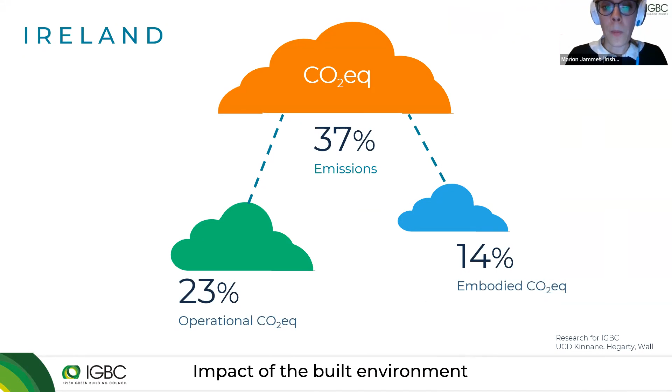And when that was done, we did ask them to do some projections to 2030 and to some degree to 2050. This is always difficult as soon as you start doing projections, but the data that you have on that slide are based on existing policies, for instance the Housing for All strategy, the Climate Action Plan, the National Development Plan, and so on. And the full carbon modeling report is available as well on our website.

But basically what that graph shows is that based on our existing policies, our operational emissions, in green on the graph, should decrease significantly to 2030. So that's really if we meet all our renovation targets in the Climate Action Plan, and we all know that's going to be challenging, but if we do retrofit the 500,000 homes by 2030, and if we build new buildings to the NZEB standard and so on, our operational emissions would decrease significantly to 2030.

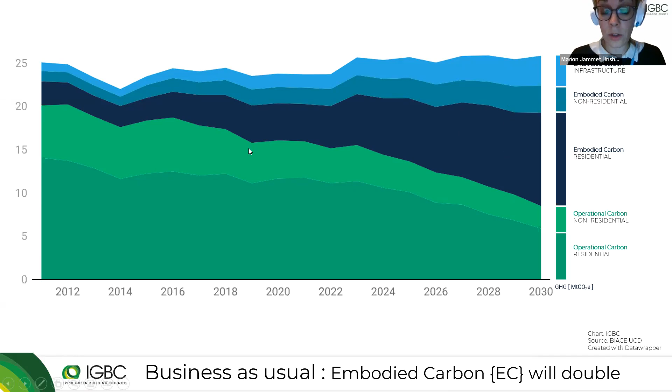The problem here is that you can see our embodied carbon emissions in blue on the graph, which currently are not really addressed as part of our policies or regulation, will keep increasing based on what we have said we are going to build in Housing for All, in the National Development Plan and so on. So the challenge there is that the increase in embodied carbon emissions will counterbalance the decrease in operational emissions, meaning that we cannot reach our 2030 targets if we don't start addressing both operational and embodied carbon emissions.

And talking with my colleagues, it's a trend that we see across Europe. Some countries have started addressing embodied carbon emissions, but they are not the majority. But overall, at European level, what we see is that just based on the existing policies and regulation, yes, our operational emissions should decrease significantly, but it's not possible to reach the 2030 target even at European level without addressing embodied carbon as well.

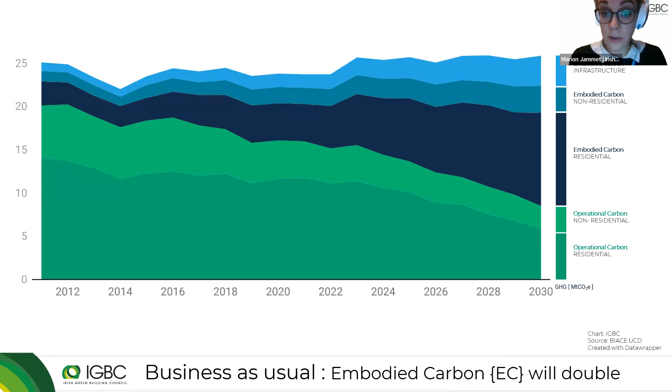So what we did once we had that data, we worked with this group of researchers in UCD to develop various scenarios that could allow us really to reach the 2030 target. And that's what you can see on that slide, and you have more details in the actual roadmap.

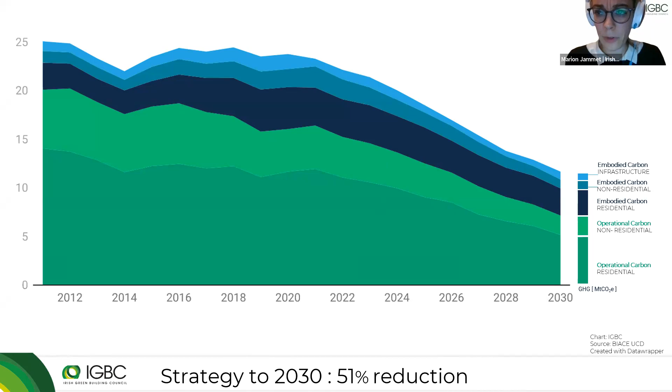But just to keep it to a high level in terms of the recommendations that we have in the roadmap, and it has something like 170 recommendations in total. But basically, at a high level, we have tried to summarize our recommendations as follows.

The first key action that we are mentioning is really the importance of prioritizing. So basically, okay, we need to focus on all the things that we need to meet our housing needs, our educational needs, and so on. But it might be the case that we may not be able to build absolutely everything within our carbon budget. So really it's about prioritizing what is being built, and that's one key message in the document.

The second one is really around optimization, and actually, sorry, as well on prioritizing, even before going there. Another way to look at that is not only at all the projects, but also trying to better understand our needs and better take them into account. We know that the average size of a home in Ireland is higher than at European level. We also know that household sizes are decreasing, and they will most likely keep decreasing.

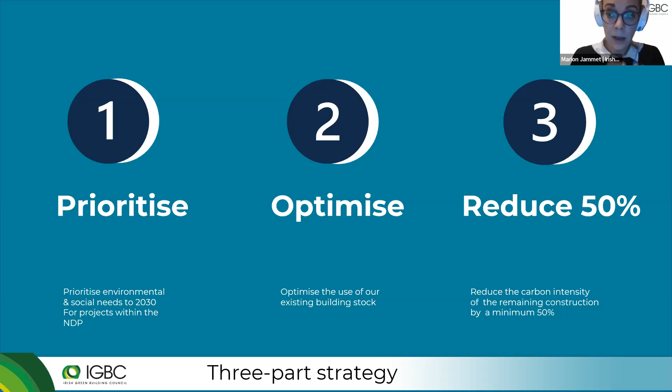So the roadmap is structured with specific recommendations for each sector. So this is kind of a summary of recommendations for government, finance, the construction industry, and producers, with obviously, I think, for all a strong focus on upskilling, and then trying very much to transition as quickly as possible to net zero projects for the industry, or for producers to start to reduce, I suppose, the embodied carbon emissions associated with their products.

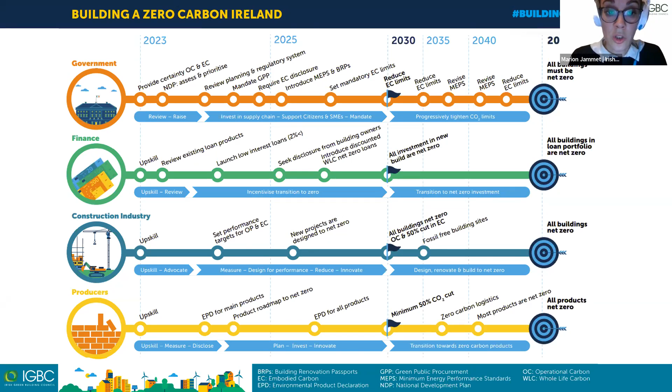So that's, again, at a very high level, but then within the construction industry, you can see in the document we have sections and chapters for surveyors, for architects, for engineers, for contractors, for developers, and so on. So what I would like to do very briefly, and I would very much encourage you to have a look at the roadmap, is just to give you an overview of the key actions that we are suggesting for structural engineers, mechanical engineers, and also for contractors. But I will encourage you to have a look at the roadmap.

But basically, in terms of structural engineers, the first key action that you can start taking in the next 2 to 3 years is very much about calculating the carbon impact of the different structural options. So obviously that means upskilling on that topic, and also starting really to optimize the structures, to reduce material use, and as much as possible propose low carbon options where possible. And we have developed a number of tools to support you in that process, and training actually.

For instance, we did develop, with support from the LDA, the Land Development Agency, a carbon designer tool for Ireland, which is a free tool that really allows you initially to calculate the embodied carbon emissions associated with a project. It's not One Click LCA, it's not very refined, but it gives you an overview at the beginning of a project.

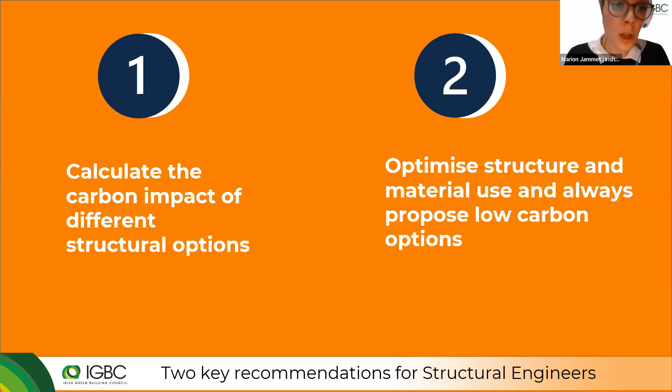In terms of mechanical and electrical engineers, the top two actions that we have recommended in the document to take in the next 3 years are very much about focusing as much as possible on designing for performance and not just for compliance. And obviously designing for compliance is important. It's there for a reason. But if you look at the most recent data published by the CSO, in terms of both building BERs and gas use, you clearly see that there is a performance gap, or perhaps more a gap that is due to the design.

So it's very important in our recommendation to design more for performance with dynamic simulation models where possible, and really look at performance modeling. And another thing that we are strongly calling for in the document is post-occupancy evaluation as much as possible, to reiterate the process and improve over time.

And the second high-level action that we have in the document for M&E engineers is very much around collaboration and working in a more integrated way in the design team. And I think it's a recommendation that we have for all sectors in the roadmap. So better collaboration in the design team, but also with owners, facility managers, and so on where possible.

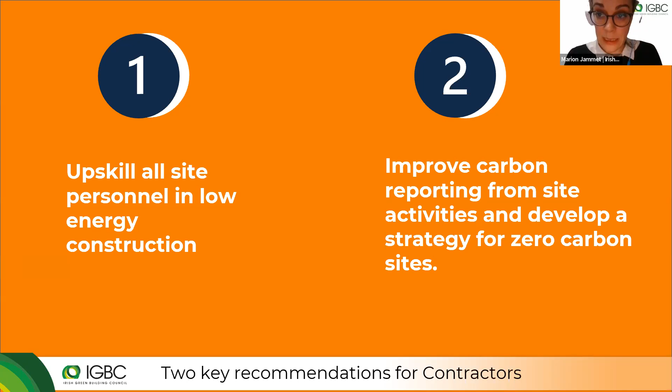So we are not saying they are perfect, but what we were trying to do when we did develop the roadmap is making sure that we had key actions that everyone in the industry could start implementing. And the second part of that message from my point of view is that at the moment we are very much in the process of developing a program to support everyone in the industry to implement these recommendations.

So in simple words, I suppose my message is very much that we are here to help, and we have developed a number of tools, but we're also here to support people in starting implementing the roadmap.

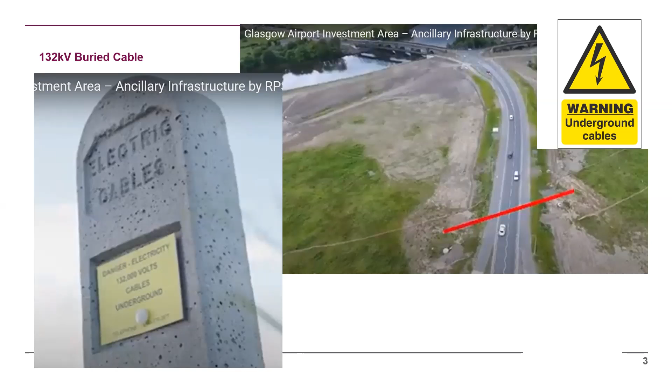The element in question, I suppose, was related to where a road needed to be built over a buried electrical cable. So the image on the right there shows essentially the completed project crossing over a 132 kilovolt cable that's shown by the red line. Building a road over an electric cable is challenging at the best of times. This particular one was even more so. It was quite an old cable, dating I think from the 1960s. It was oil filled, as was the technology at the time. So you had liquid oil flowing in the cable.

This, along with the age of the cable, it was close to 60 years old, meant that it was very vulnerable to any kind of movement or disturbance during construction. Damaging the cable would firstly potentially damage or disrupt electrical supply. This cable supplied over 20,000 homes. I think it also supplied the airport itself. Any damage to the cable would also result in a leak of the fluid from the cable into the environment.

People may remember that was quite newsworthy a couple of years ago when some leaks from similar cables owned by the ESB came to light. So the owner of the cable was justifiably worried about the prospect of a road being built over the cable. They essentially said, don't touch it, don't go near it.

They kind of said, look, don't even think about it, don't even talk about it. You know, they were worried that it wasn't in great condition even to begin with, and any kind of disturbance to it could have been very problematic.

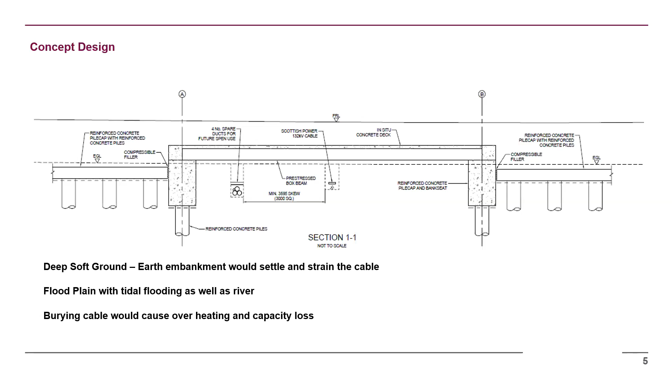The ground was poor, so the bridge itself would have had to be piled. I think we were looking at piles 25 to 30 meters deep. We would also have a piled run-on slab to further minimize settlement. Again, piles likely to be 25 to 30 meters deep. So had we followed the concept design, we probably would have ended up with something a little like this bridge, which was a different bridge built on the same project, a conventional reinforced concrete bridge.

So I suppose what's not to like about the conceptual design? In the context of today's lecture, I suppose, first thing was it had a very high embodied carbon, as is normal for most concrete structures. We were looking at an embodied carbon amount of over 1,500 tons.

Separately, I suppose, we were quite worried about the prospect of doing a lot of piling in the vicinity of the cable, causing ground disturbance and vibration, and also bringing in heavy cranes and other heavy machinery into the general area. With the best will in the world, sometimes these things go wrong, and if anything did go wrong, the cable could have suffered for it. So we were very interested not only in reducing the embodied carbon of the structure, but also improving its buildability and reducing the risks to the cable.

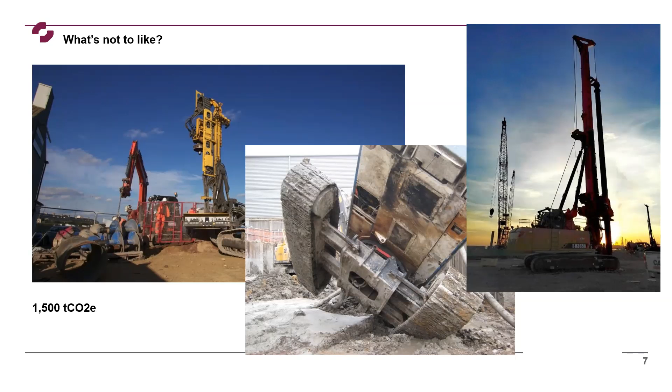So the first thing we looked at was a variety of lightweight fills to see if we could reduce the settlement on the cable by simply reducing the weight of the embankment. We considered initially expanded polystyrene, which is a conventional enough material for that type of application. It's difficult to use in flood-prone areas in that it does have a tendency to float away. And we worked out we would have had to make it quite heavy in order to avoid floating away, and that would have essentially reduced the point of having a lightweight road.

The other lightweight material that sprung to mind was expanded clay aggregates. These wouldn't be vulnerable to floating away, but in common with expanded polystyrene, one of their other uses is for insulation. So we would have spectacularly failed on the goal of trying to avoid the cable heating up even more.

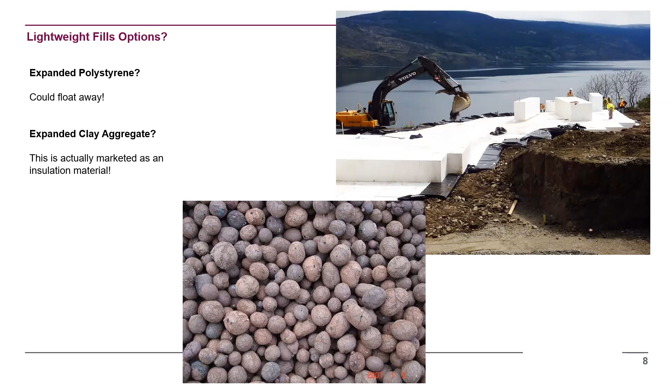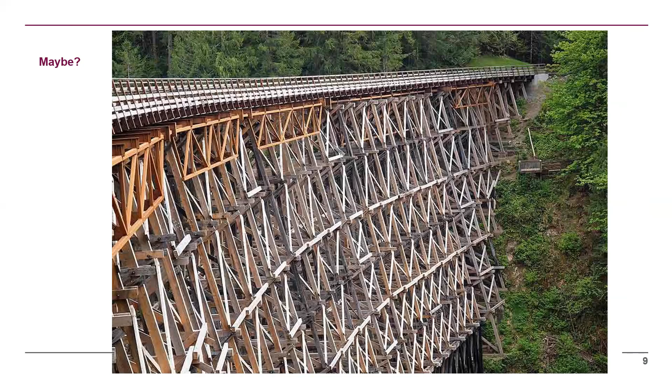We did then find the modern equivalent of that type of structure in a recycled plastic geocellular unit. Most people are aware of these things being used for underground storage tanks and attenuation facilities. We considered, well, could we use them to create a whole embankment that would be lightweight, that would let water through it, and would allow airflow over the ground surface above the cable to prevent the overheating.

This would also be extremely low carbon compared to the large amounts of concrete that would be needed for the reinforced concrete bridge. So it seemed like a good idea, and working with the contractor and also in discussion with the cable owner and the local authority in Glasgow, we explored the idea. And this is the actual unit that we ended up using. It's a Wavin AquaCell Core unit designed for deep applications, and critically is suitable for both regular and heavy traffic loadings, which was what we would need to support on our road.

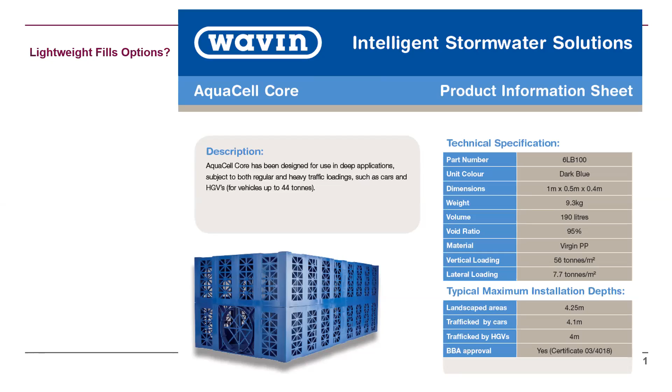Not only did we, by using this material, not need to bring in heavy piling equipment or heavy cranes. In fact, when working up close to the cable, we were able to bring in the material practically by hand. So any ground disturbance near the cable was reduced practically to zero.

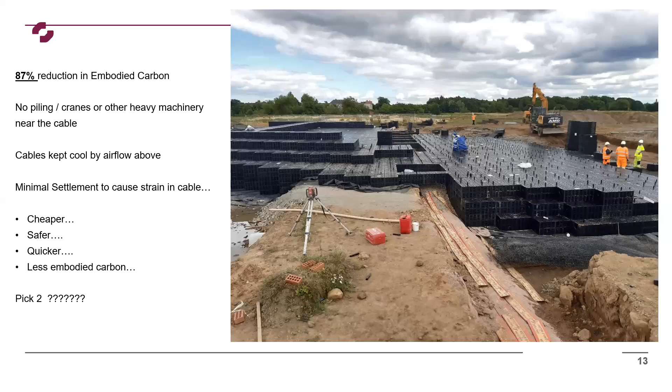So this is what the cable crossing ended up looking like. You can see a ridge in the middle of the picture there. The cable is buried underneath that. And the black units are the geocellular units I mentioned. And the road will be built on top of those.

So as I said, it prevented heavy duty piling, prevented cranes having to swing in heavy concrete beams and other heavy units. It kept a reasonable airflow in and around the cable to keep it cool. And because the crates or the units are essentially all air, the whole structure was extremely lightweight and prevented any settlement of the cable.

So it's often said that you can have program, cost, or quality. You need to pick two out of those three. In this case, we wanted something that had less embodied carbon, that was low cost, that was safe to build, that was quick to build. And we didn't have to pick two out of those four. We managed to get all four of them with this particular design.

This is the engineering drawing of the solution. So the kind of turquoise squares there are the geocellular units. They extend a little bit below ground to balance out the pavement on top in terms of settlement. We have a lightweight concrete slab directly under the road surface, and we use some lightweight expanded clay aggregates under the footways and to finish off the edges of the units, and wrap the whole thing up in fairly robust geotextiles to even out settlement as well.

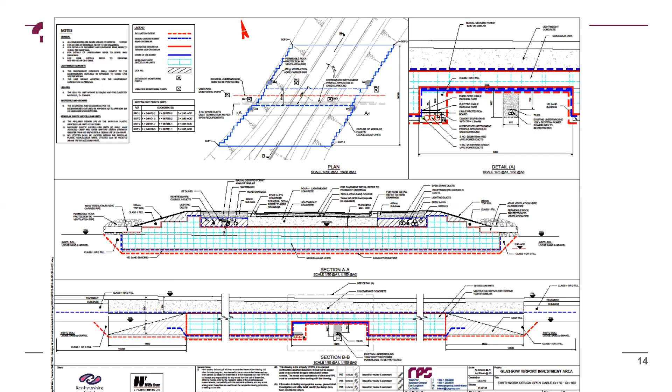We were conscious that we were using these units in a new way. They haven't been used to build an embankment before. And even the concept of crossing over buried electrical cables with them was quite new. So as you can imagine, we had to do a lot of validation prior to construction to ensure that it was going to work. We looked at the settlement using 3D finite element modeling of soil pressures. The heat dissipation calculations were done by our electrical engineers to verify that the cable would not get any hotter with this structure over it.

We chose to get an independent category 3 geotechnical check of the design. And as a sort of final belt and braces, we put a lot of instrumentation into the structure and on top of the cable itself to verify that we had successfully reduced settlement, that we had prevented the cable going into curvature and straining, and that the temperature inside the structure wasn't getting elevated. We've actually found that rather than settling with an embankment over it, the cable has actually gone up a few millimeters since the construction. So we're probably a little bit too successful. We overcooked it a little bit.

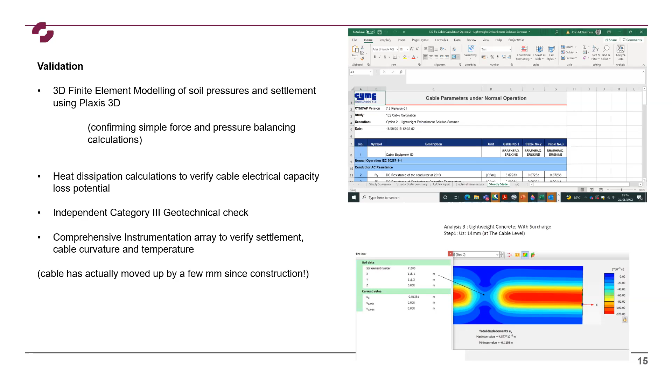I think the headline figure of an 87% carbon saving was very impressive, and we got a lot of very positive attention for it. As Shane mentioned, the Institution of Civil Engineers inaugurated the Carbon Champions program in 2021. And this was where they recognized projects and individuals who had delivered on large carbon savings. And the project team in Glasgow, RPS, Wills Brothers, the contractors, the cable owner and the client were included in that first list of champions.

We also got awards from ACEI and Engineers Ireland for the project, and also a good write-up in the New Civil Engineer. So I think it was a very successful demonstration of how carbon savings can be achieved. And important to note that not only did we save carbon, but we got a lot of other positives out of thinking outside the box a little bit.

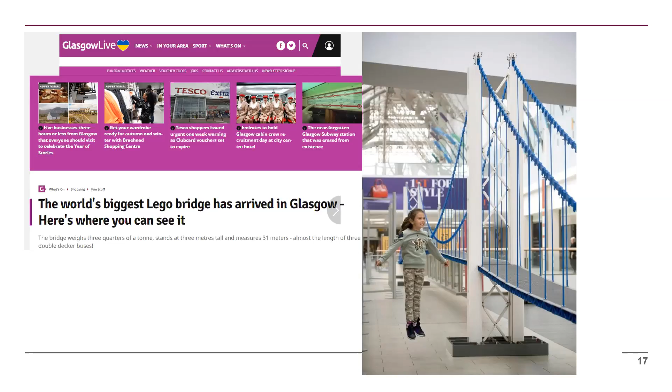That's it. The Engineers Ireland Engineering Excellence series that I mentioned produced a good video on the project. It's a 3-minute overview covering pretty much what I've talked about, and I think it's still available on YouTube if you just do a search for Glasgow Airport Investment Area. It's a good watch for a few minutes.

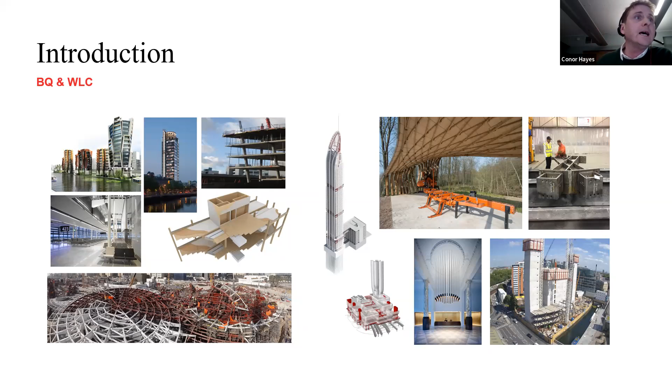And I guess as a slight tangent, picking up on one of the points in Marion's talk, we're working with a couple of contractors around Dublin specifically at the moment, in terms of trying to measure the carbon emissions that they are responsible for on site, and to figure out the wastage that they're actually creating or not creating on site, so we can start better understanding the numbers that we're calculating when we do LCAs or life cycle assessments.

So Boland's Quay is an urban regeneration scheme which breathes new life into a formerly derelict industrial site. The restoration of 5 historic assets sits alongside 3 new landmark tapered towers over a 3-story basement. There's a new pedestrian bridge and 2 new plazas which link the campus into the local area. It was completed in 2022 and handed over to Google as an expansion of their EMEA headquarters.

It will accommodate up to 2,500 workers across about 37,000 meters squared of net floor area of office, resi, retail, and cultural space. Google are currently fitting it out, and we're involved in part of that, adding some of the fine googly things that they like, such as link bridges, a gym, feature stairs, rooftop sports pitch, and so on. Arup provided civil, structural, MEP, geotechnical, facades, traffic engineering, environmental consultancy, PSDP, and lighting services for the campus. As the PM, this stat sticks in my mind.

325 people booked at least some time to the project across the duration of it, across 44 disciplines, some of which no longer exist in the current form, such as CAD. So given the audience, I should also be careful to celebrate the input of engineers across the project.

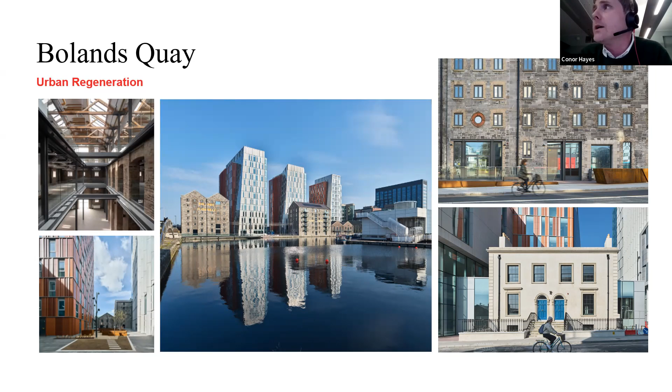The main contractor, enabling works contractor, specialist subcontractors, temporary works designers, the assigned certifier, the fire engineer, the monitoring team from AECOM specifically, the flood barrier specialist, and some of the engineers we dealt with in Dublin City Council as well. And it is, of course, a testament to the broader project team, architects, BKD, and so on.

So that's just a site plan of the project. Looking there, you can see the three big blocks in the front are Tower 1, Tower 2, Tower 3, which are the prime new build aspects of the scheme. You'll see a small block running along the bottom of your screen is Barrow Street. You'll see Building D, which was essentially two old houses which were retained.

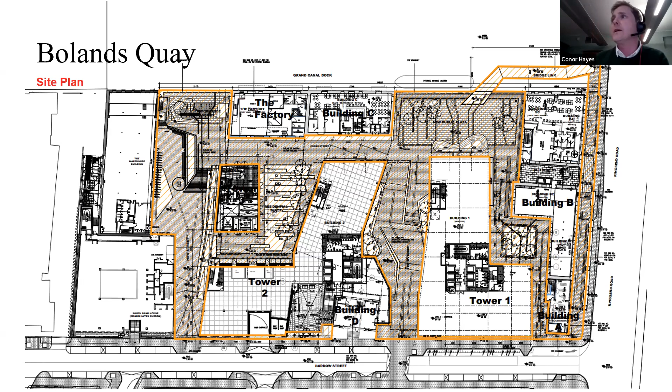On the right hand side there was Building A and B, and Building B is essentially five buildings, B1 to B5. And then facing onto the canal up at the top of the screen is the factory and Building C, also retained.

And then sitting beneath that, you can see we've drawn the outline of the basement. So there's a sometimes two, sometimes three-story basement that goes over much of the site, essentially stepping around either the quay walls or the listed buildings. So we didn't try to put a basement beneath the listed buildings or beneath the retained buildings, because they're not all listed.

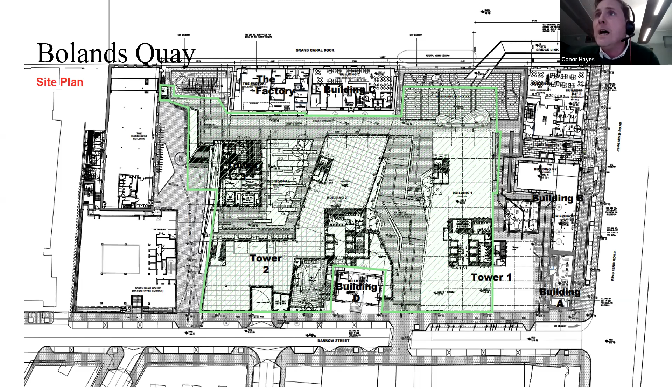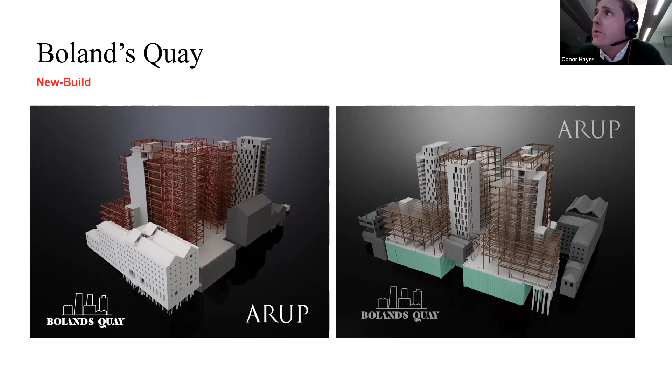The third tower is a 16-story resi, so Consequence Class 3 RC frame. It is RC flat slab for the floor plates, and notably for the structures, because the core was so slender, it's stabilized in large part by the perimeter walls, which are required to support the facade, but they don't go all the way down to ground, so you create sort of an outrigger effect with the perimeter columns. And there's lots of other features.

So a bespoke project-specific unitized facade solution was developed that was capable of being modified to suit all the various facade conditions. This was factory assembled, brought to site, and craned into position, which, as part of the embodied carbon thing, helps to reduce waste. The protruding feature aluminium fins were the only add-on for site installation, which minimized the requirement for a more traditional scaffolding approach.

And again, we won't get into great detail here because we want to move on to some of the carbon aspects, but the biggest challenge for the project was just the level of complexity. We're trying to do an awful lot of different things on that site when you're trying to retain the buildings and have different buildings with different uses and different structures and different MEP systems and so on. And the MEP system is flexible with a modular configuration, so it could all be treated as one or it could be split into the different buildings and operated separately.

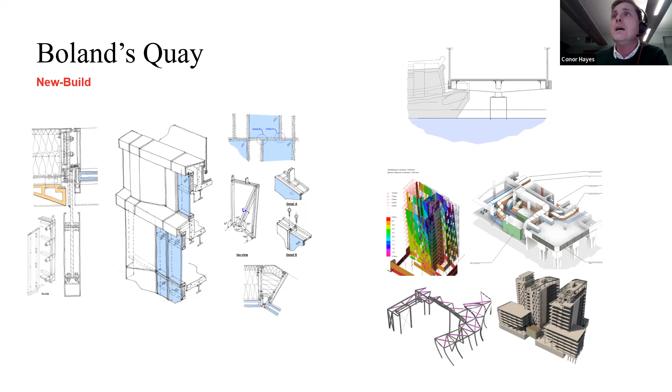And in terms of the new structure within them, we had new timber floors and refurbished cast iron columns, new RC concrete frames, composite concrete slabs and cellular steel beams. In some places we had Slimdek floors, which are obviously quite a heavy embodied carbon solution, but the head heights are really, really tight. And we managed to incorporate ambitious MEP measures such that we achieved nearly NZEB building requirements in those listed buildings.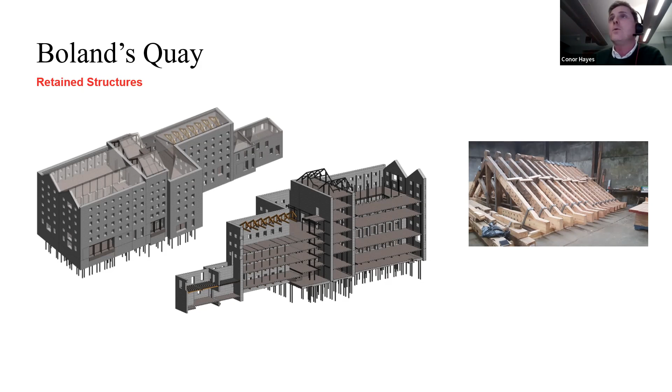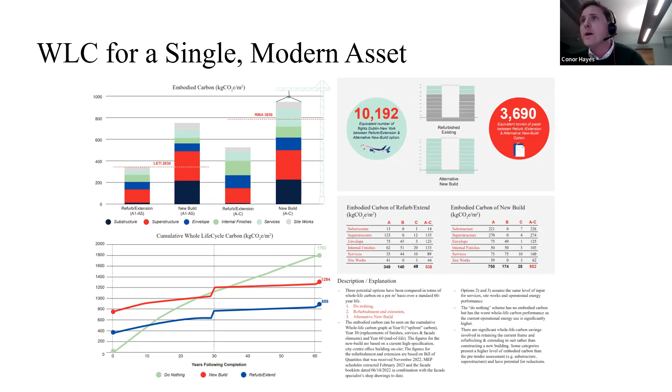Then we looked at a retain, refurbish, and extend option, where we infilled some atriums, we added two stories, we improved the facade, the MEP, and so on, and you still have an investment of embodied carbon, but a smaller one. And with the better operational performance, that blue line is by far the best whole life cycle carbon option for the project. So what I'm trying to introduce there is, on a single building, that's the typical answer we find, which is that it's very hard to justify usually a demolish and rebuild as the best carbon answer by itself. So I'm going to leave that thought hanging, and we'll move back onto the building.

So the site has been in use as an industrial site since at least the 1830s. It was part of Boland's Bakery, which was the largest bakery in the city. Effectively, that merged with Jacobs to become Irish Biscuits, and slowly, I think by about 2000, the site was no longer in use. So in that time, a whole series of different buildings were built from different eras, a series of 19th century warehouses, a series of 1940s, 50s, 60s silos and other bits and bobs. And there was severe degradation, spalling of concrete, rotting of timber, particularly in the years between the end of use of the factory and when our development began.

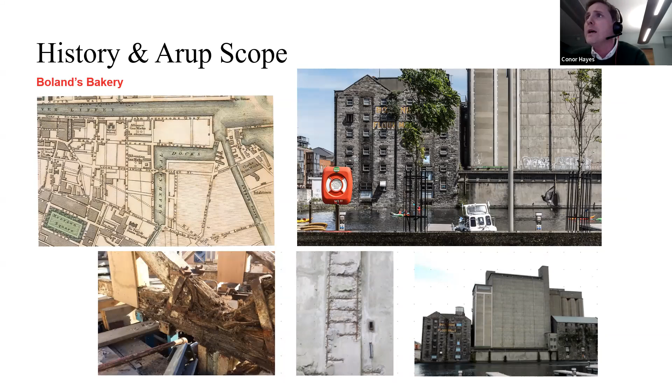The inside was almost free of internal structure, so we had a pretty clear run at being able to make good use of it for space in the future. It wasn't in too bad a condition. I think the walls had to be repaired and the roof had to be replaced, so we retained it.

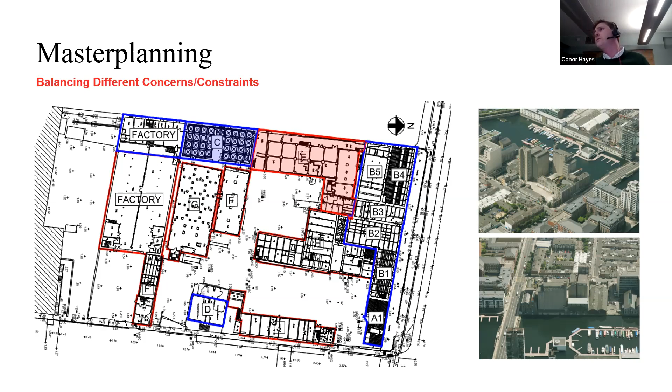So I will pick up that point in one sec. So one of the excellent things that has happened, I think, in recent times is the new Dublin development plan. It specifically talks about getting a justification in terms of embodied carbon for major demolish and refurbishment, or demolish and new build options. That's something we were occasionally asked for by planners before, but is now something that's been asked for as a matter of right.

But I think one of the important things to consider is it doesn't just ask for that justification of embodied carbon. It also looks for an intensification of use close to public transport. It also looks for a dynamic city that's capable of attracting FDI investment. It's also looking to try achieve higher densities in a 15-minute city and so on.

And so one of the big challenges for these urban regeneration schemes is trying to find a framework that we can live with, that Dublin City Council and similar authorities can live with, so that we can get the right balance here in terms of the uses that a modern society needs and minimizing our carbon footprint.

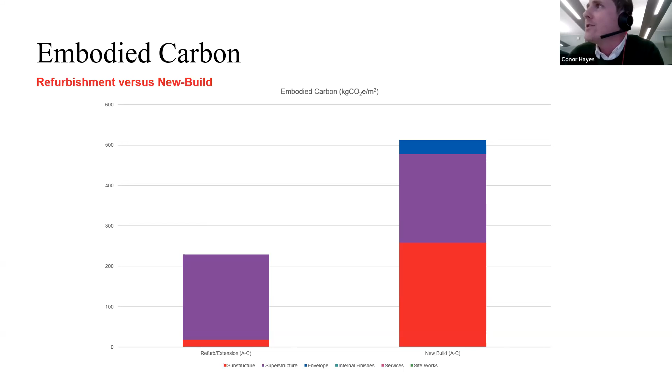So we spent a huge amount of time and effort on it. In the end, all it involved was scabbling the existing screed and adding a new 75mm depth of screed on top with some rebar, but it involved a lot of engineering effort to get there.